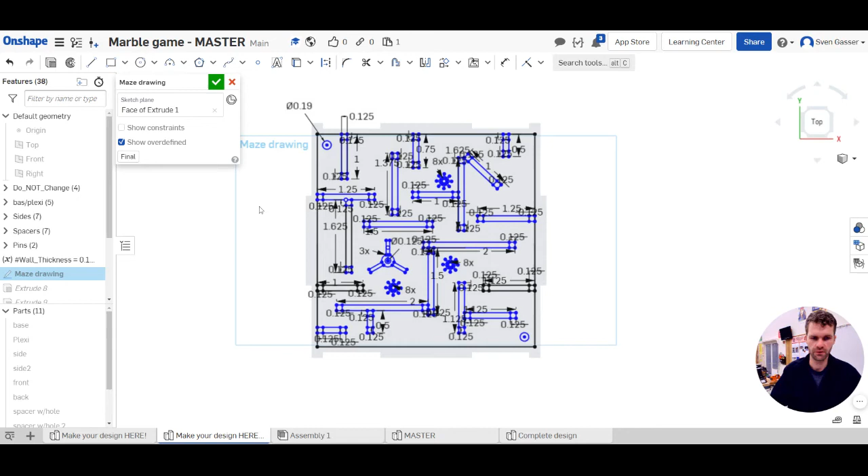A little frustrated after doing all that stuff, and I apologize. I know it's a little messy.

You are probably seeing all sorts of numbers all over the place like this. The good news is when we push this green checkbox, that will all go away and we won't see that anymore. I have already some steps done here, so I'm going to delete these so you don't have to look at that.

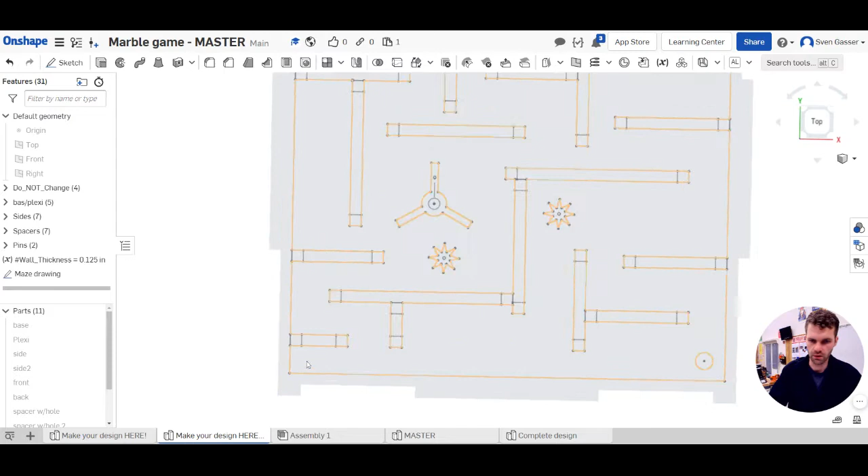When you push that green checkbox, you will see a nice clean sketch like this, and it won't be a big mess. If you go and examine it, you should make sure that all these little squares on the ends look like squares, and they look pretty good to us here.

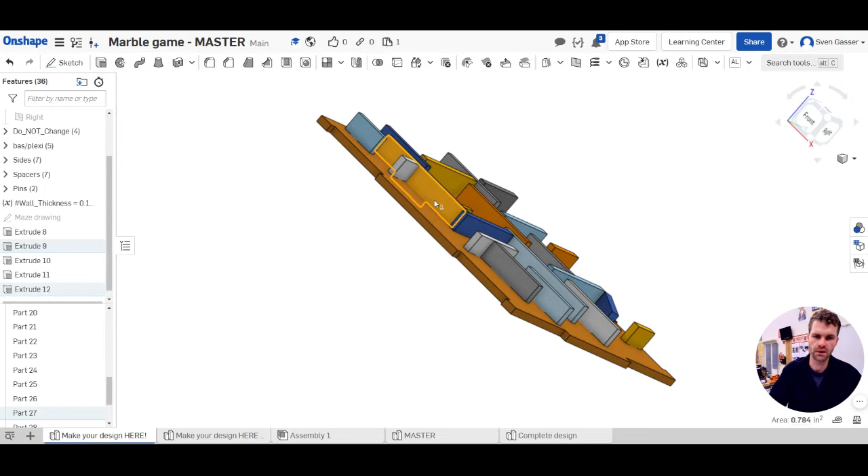The next step is we are going to start extruding these walls, and we're going to make the top part of it. Notice it's a T shape, but we're only going to make the top of it right now. So let's start an extrude, and you are going to want to select all these little faces, all the little parts here.

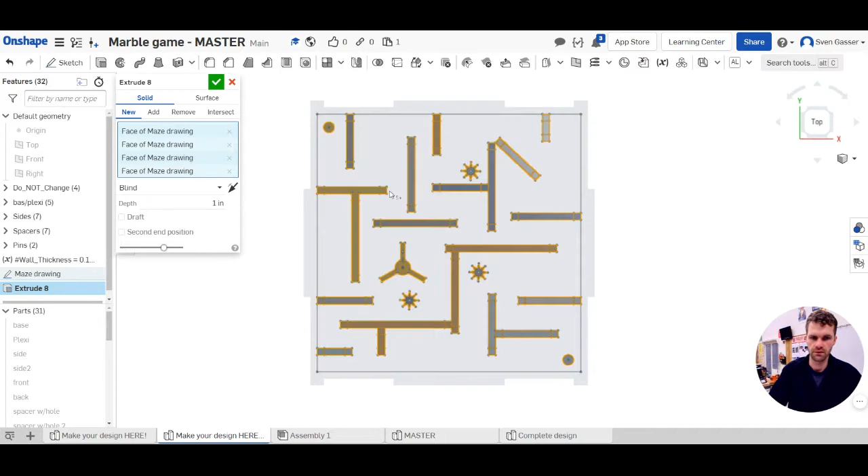If you get crazy, you might try to do it the reverse way: select everything and then deselect the parts we don't want right now. That might go a little faster for you. You can see I got all the walls there. Or if clicking on that isn't working for you, go ahead and click on all the pieces separately.

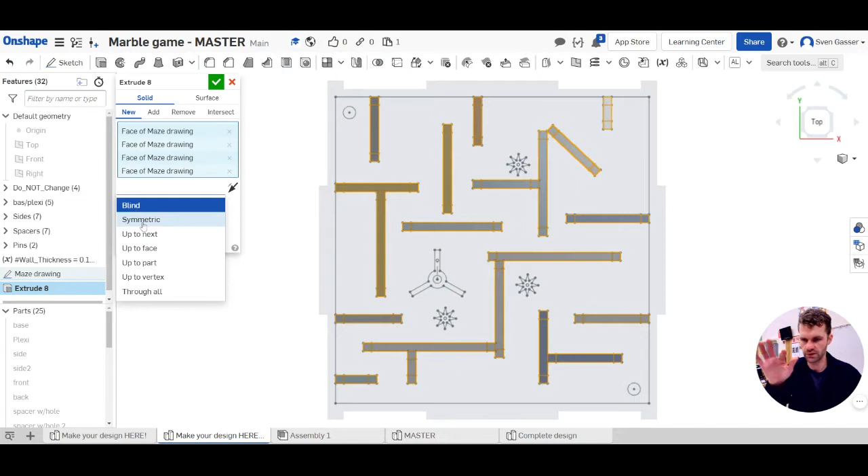We're going to use this type of extrude on this list here. Usually we have blind, where we just type in a number, but we're going to say up to face. This allows us to unhide this piece of plexiglass that's going to go on top here and say extrude up to this face, and you'll see they will all stop right there. We're going to want to make sure it says new.

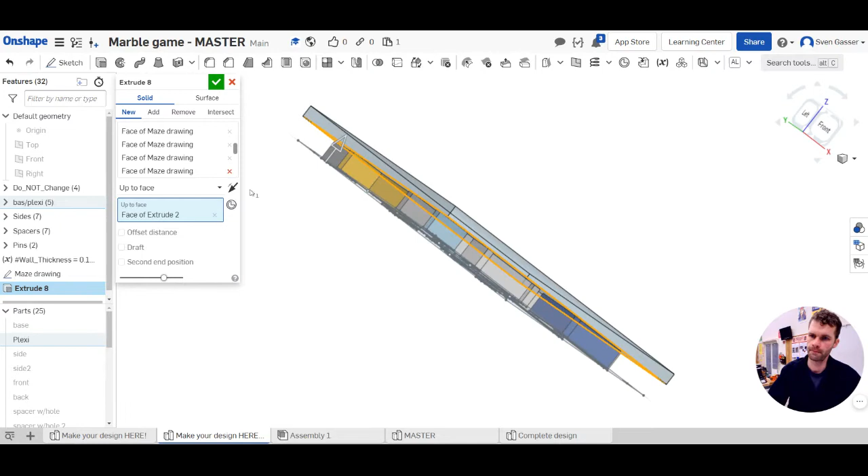And I can already see something I did wrong here, so I'm going to show you this common mistake that you'll want to avoid as well. All those pieces are now the correct height.

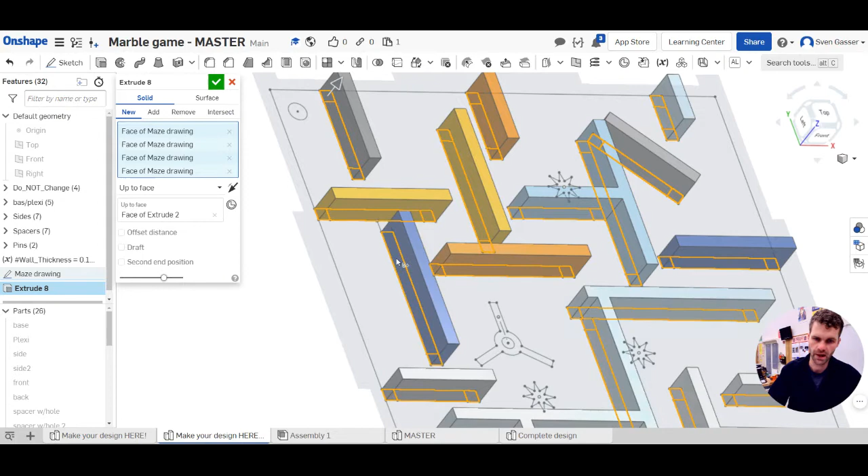But you can see this piece is joining these two pieces together, which is not going to work for our laser cutter. So we're going to have to come back here and click on these pieces, and notice it started changing to a different color.

We're going to have to do a second extrude to get all these pieces that are touching. Anything that's touching like this, we're going to have to deselect so that we don't get one solid piece there—it wants to kind of join those. Looks like I got one more here.

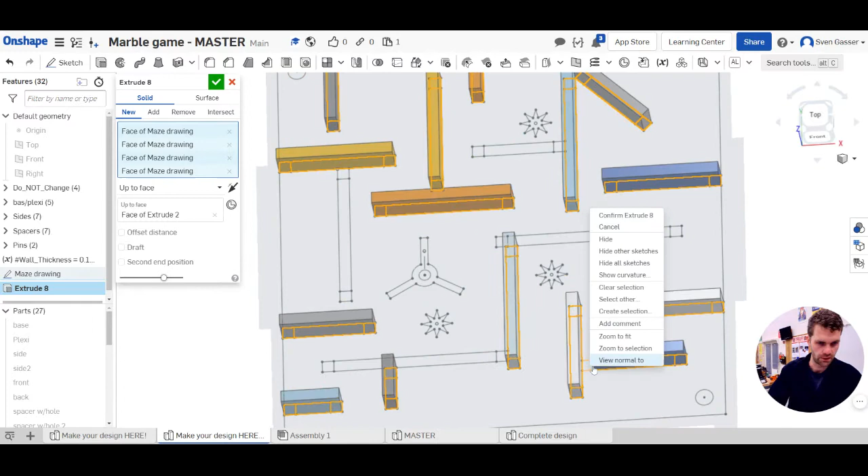Go make sure nothing's joining together. A good giveaway is that they'll be the same color, like you saw there. And now they're extruding up to that face, and I'm going to say OK.

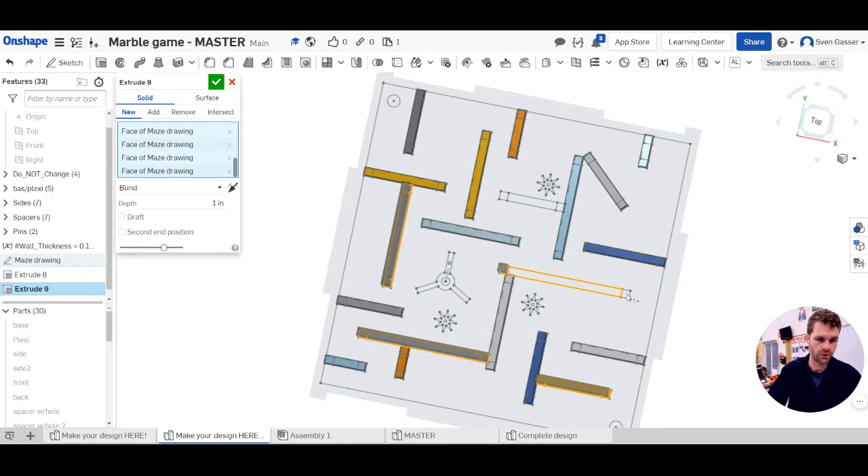Now I'm going to repeat that step again with all those pieces I missed, basically getting all the ones I had to deselect the first time. It's just how the software works—it doesn't like to give me those as separate pieces, it doesn't know how to deal with that.

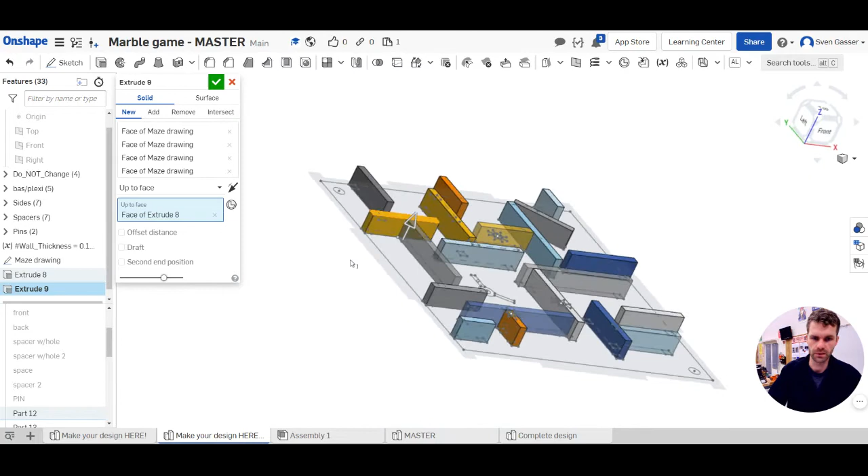So you'll see again, they're too tall. This time we can do an up to face, and for the face, we already have one in the correct spot—we'll click the top of one of these. We don't have to go do it from the piece of plexiglass. You can see it's going to extrude that to the correct position. All those wall pieces are the correct height now. Looking good. We're going to say OK.

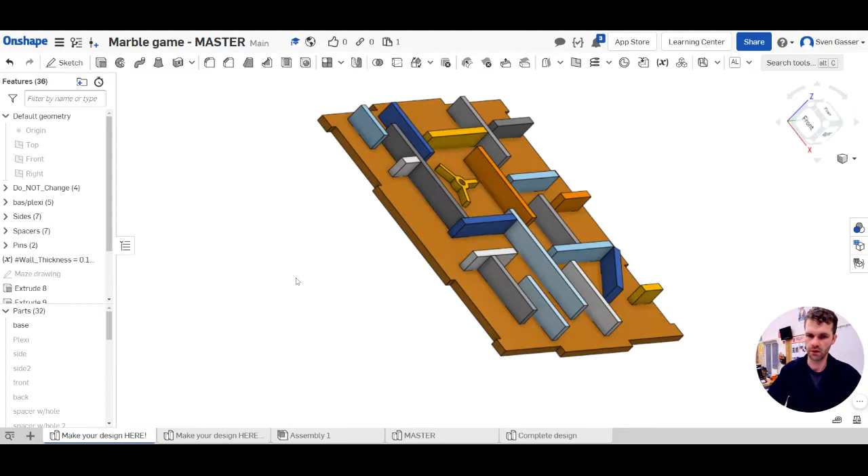Now you have all your separate wall pieces. Now we're going to put the bottom piece on all these T pieces here. I'll hide that for a second so you can see—right now we only have a rectangular wall. We're going to add these little T's on the bottom of all of them. So let's view this from the bottom side, and we're going to do very much the same thing.

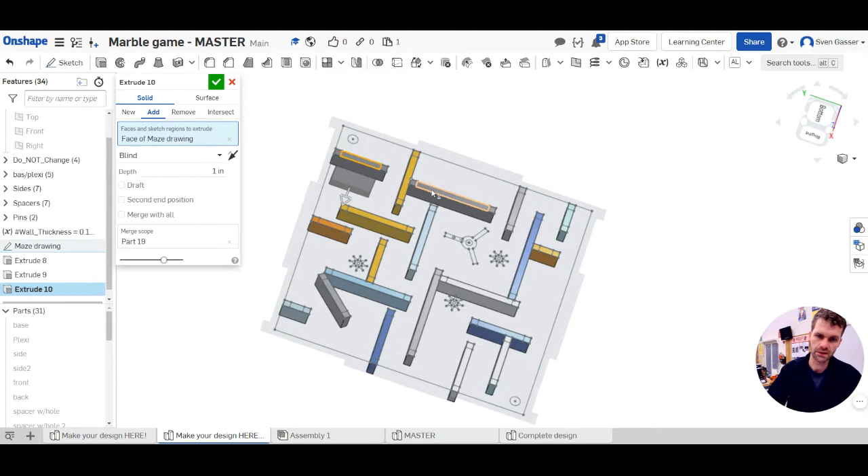I'm going to say extrude and start clicking on these pieces, and you'll see right away it's going the wrong direction, so let's flip that around. This should be the thickness of the material, and you'll start to see it's giving me a nice little tab there to make that kind of T shape.

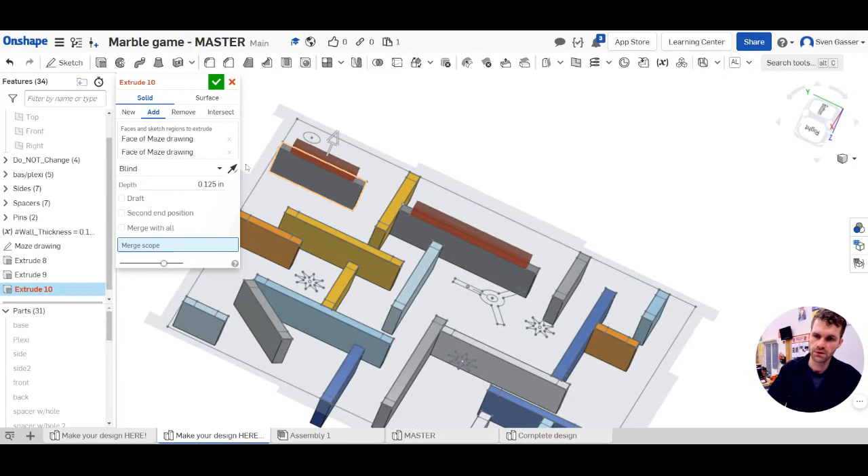But we are going to want to add this to the other material here, right? We'll come back to the merge scope in a second. But essentially, before you go and click on everything, we want to do the same thing—we have to click on these as separate pieces.

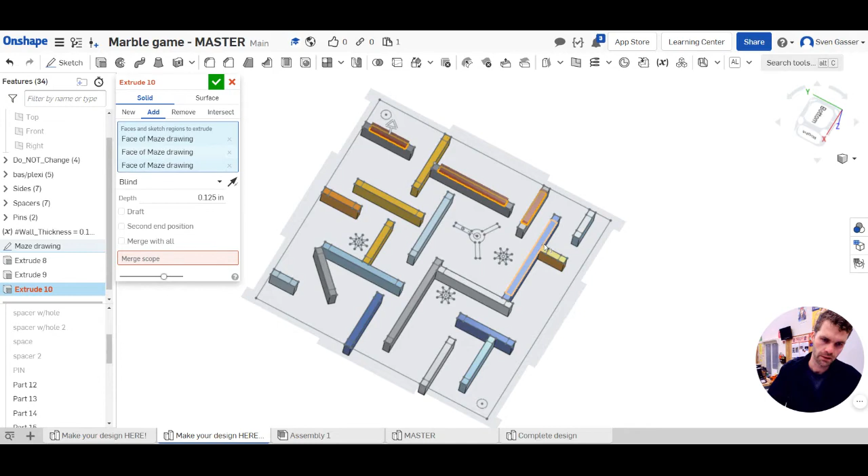We have to go click on these as separate pieces. We'll come back to the merge scope later. Clicking on these little guys one at a time, skipping the ones that are touching each other, like I'm not clicking on that blue one for the same reason we just did a few moments ago.

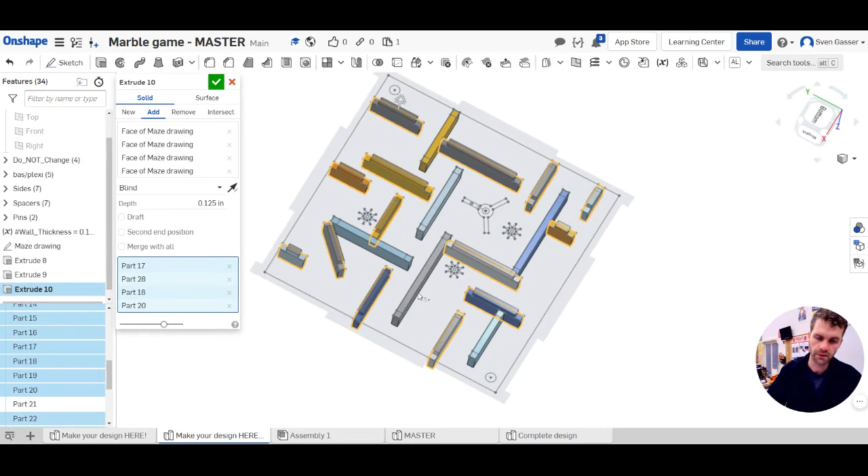Merge scope is going to be all the pieces we're extruding on. So this one would be on that merge scope, that one, that one, that one, that one. I know it's a little tedious here, but that's the way it goes sometimes. You click on them all, and I think I got them all. We can always check that later and come back if I missed one. All right, we're going to say OK.

And we'll start to see those little tabs showing up there. Now we repeat that again for all those ones we had to skip. There's a little bit of repetitiveness here, and I'm just hunting those down, like that one and that one. And then the direction needs to change again.

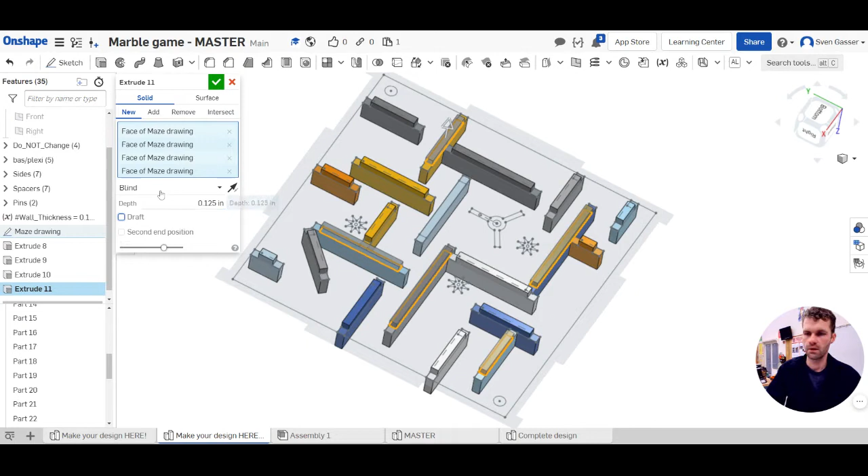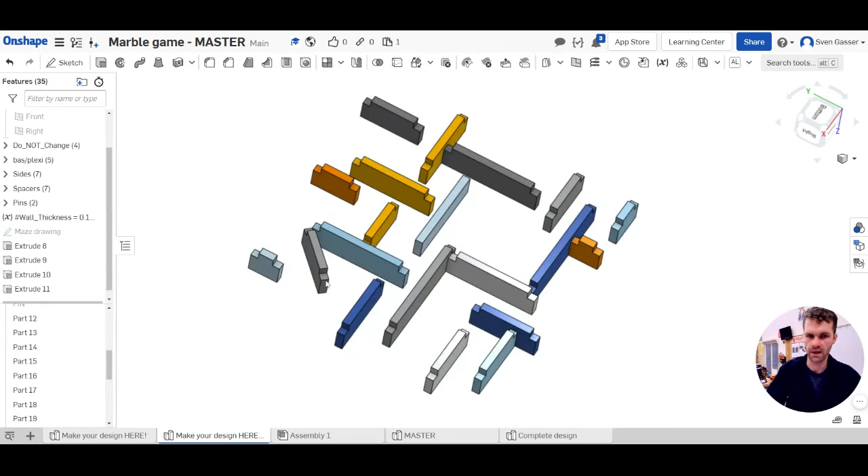And the thickness of the wood is what we're going for there. And then, let's see, we want to add, and again, the merge scope should be all the pieces we are adding to. I think I got them again there. If you didn't, you can always come back and double click to edit these and make them look good again. But let's see, I'm going to hide that so I can view a nice clean view there. That is looking pretty good.

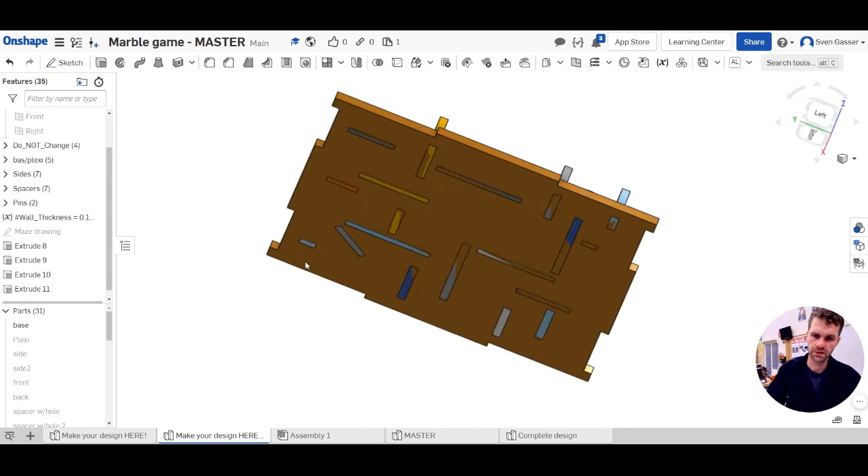All right, so I'm going to do one more step here, and that is going to be to show the base piece. And this piece, like we've probably done in some of the other projects we've done so far, you can see that there's no hole in this base piece right now.

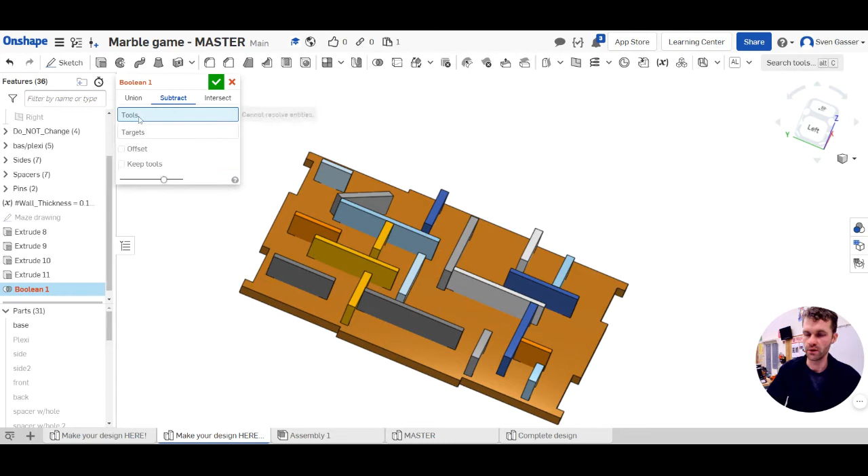So we are going to do this little thing called a Boolean, which is we're going to use one piece to cut a hole in another piece. So we're going to say subtract. The tools are the pieces that are doing the cutting. The targets are the pieces that are going to get cut.

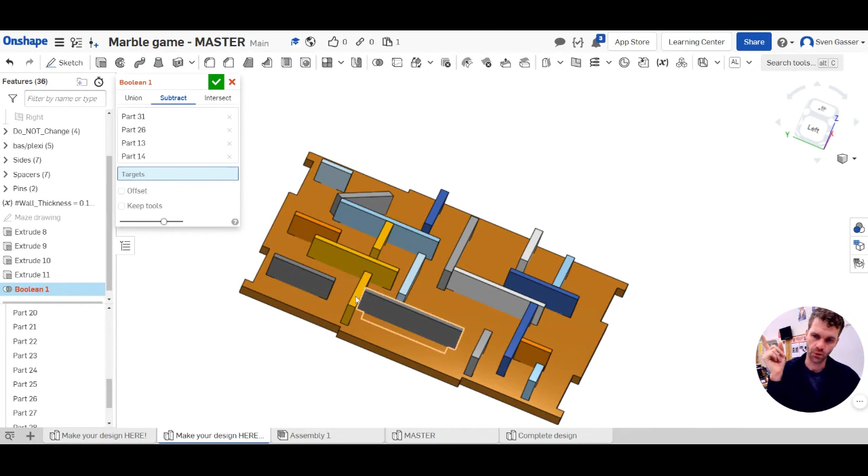So the tools are all the little wall pieces all over the place, clicking on them. This video is repetitive, I know, but we'll get through it. And finally, your targets, you click on that, and then that's going to be that base piece. You'll notice it kind of shows you what it's going to look like. But if I push that checkbox right now, it's going to delete all the tools, all the little walls there. So we're going to say keep tools right there, and then you'll see those show back up, and now it's going to be good.

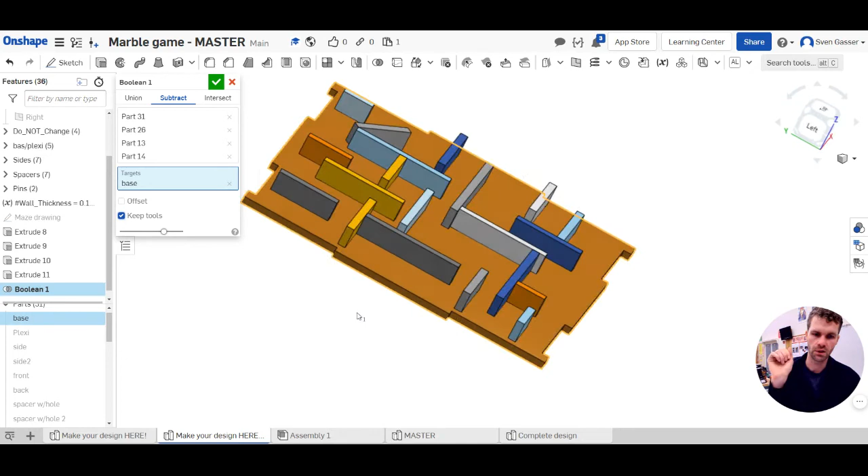And look at that, we're going to have all those holes there. We'll push OK, and voila, you have a piece for the base that is going to be the right size. And you'll notice one more thing here.

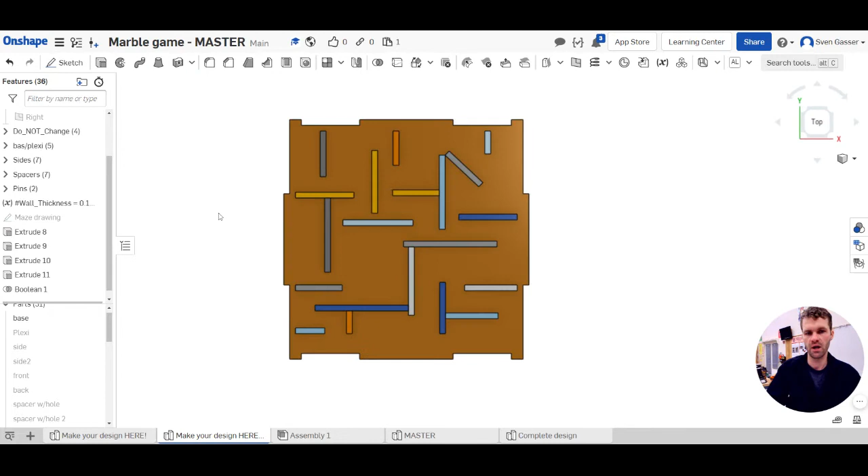I don't have a couple other pieces here. I need to extrude some holes here. So I lied when I said I was going to show you only one more thing. Extrude all these holes. We want to make sure they're removing material, cutting holes through that piece.

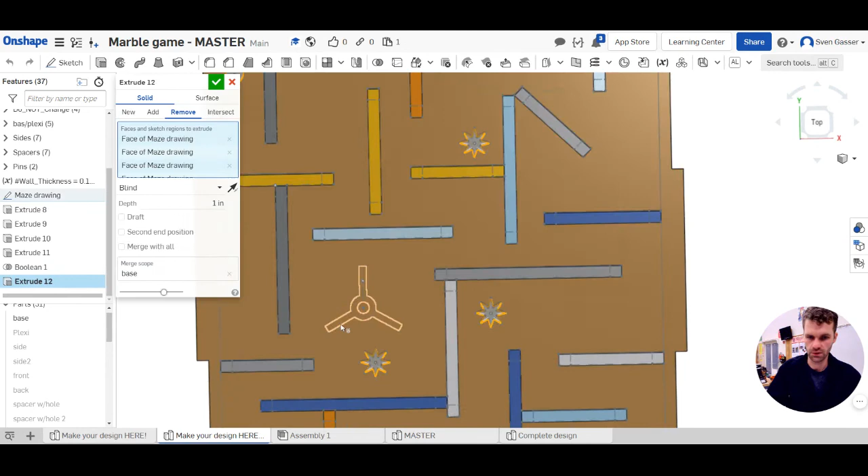And you know what? I actually wanted the center of this as well, because that is going to be where a bolt goes, that we can put a bolt in there. And, you know, I lied one more time. We got one more extrude to do. I need to extrude this guy, making it a new piece for the thickness of the piece of wood. That's going to be a separate little piece we're going to do.

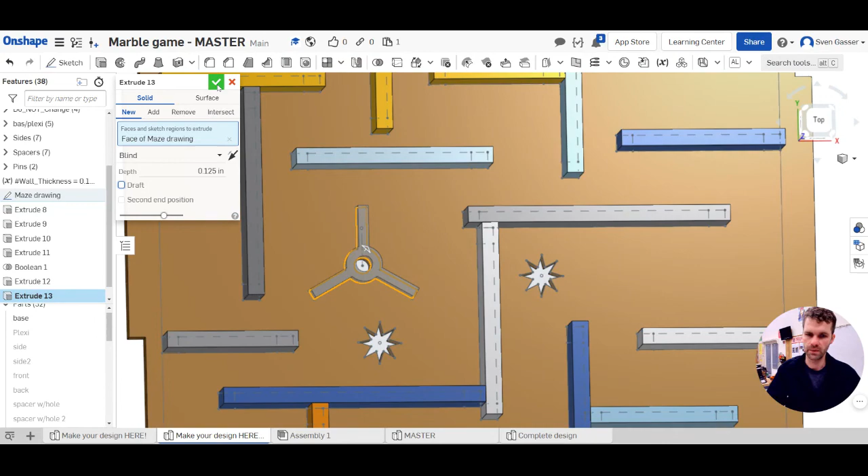And a bolt will go through that hole. And I'm going to hide that sketch again. That is looking pretty darn good.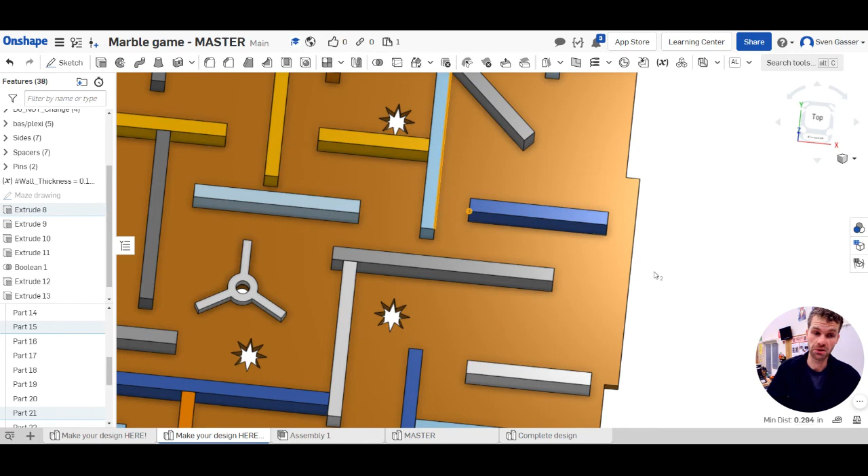So at this point, you are welcome to go back and change anything that's needing changing. If there's a gap between two points that is less than a quarter of an inch, 0.25, the ball will not go through there. So just be aware of that. If you don't want the ball to go through, if you want too tight of a squeeze, that's up to you. But keep that in mind.

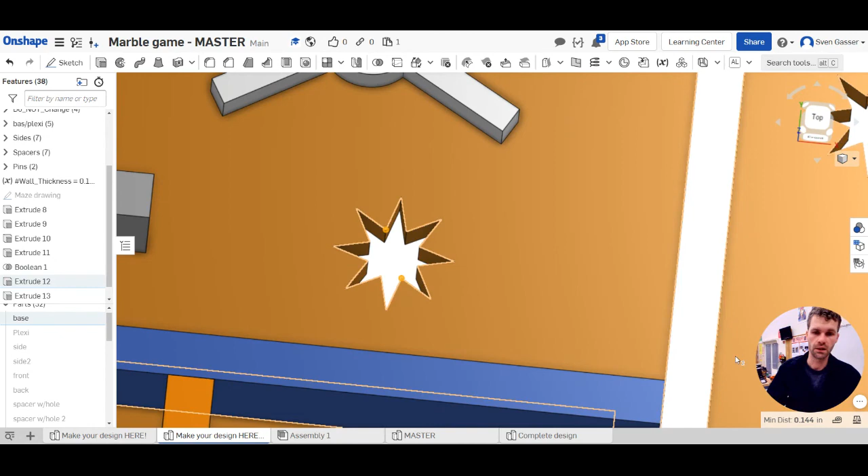And then also just a reminder before we're all done here, the holes of any sort, the distance across this hole should not be any larger than a quarter inch. We do not want the actual ball to fall out of the hole, otherwise you're probably going to lose it. So the ball should stay in there.